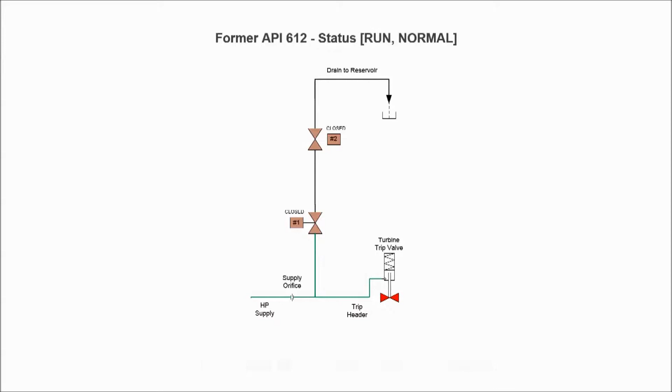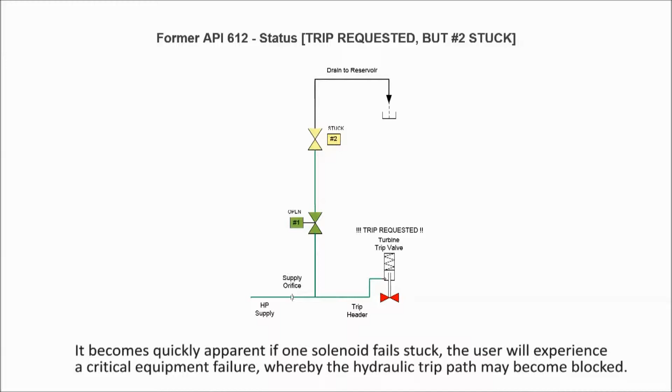In the past, API required 2 valves in series, as shown here. It becomes quickly apparent if one of the solenoid valves fails stuck, the user will experience a critical equipment failure, whereby the hydraulic trip path may become blocked. The updated API moves to a parallel configuration, shown here, allowing for improved safety, but leaving the user exposed to nuisance trips.

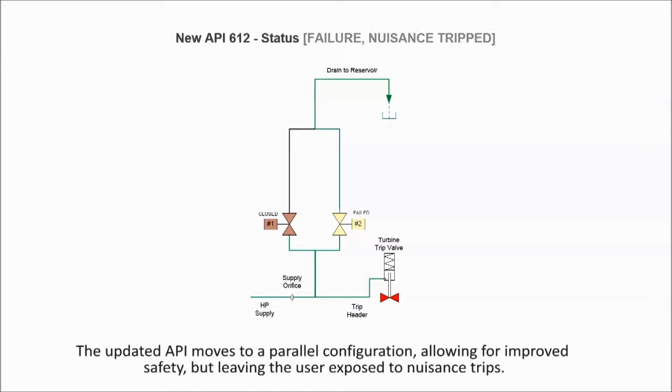Section 12 has added an enhancement to the reliability through a 2 out of 3 recommendation, or a 2 out of 2 taken twice as shown here, where no single failure can prevent the unit from tripping, and no single failure would cause a spurious trip. API has also recognized the high temperature applications that are common for trip mechanisms by updating the insulation class from F to H.

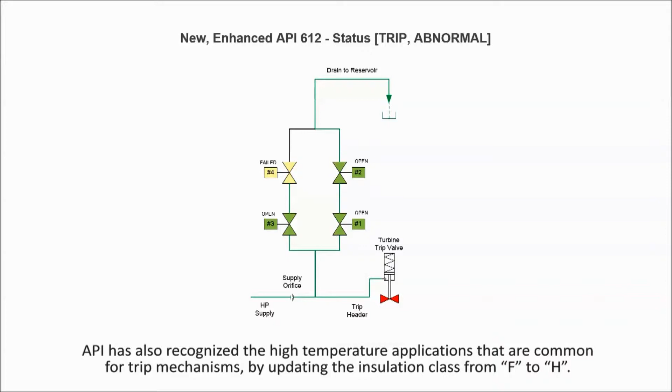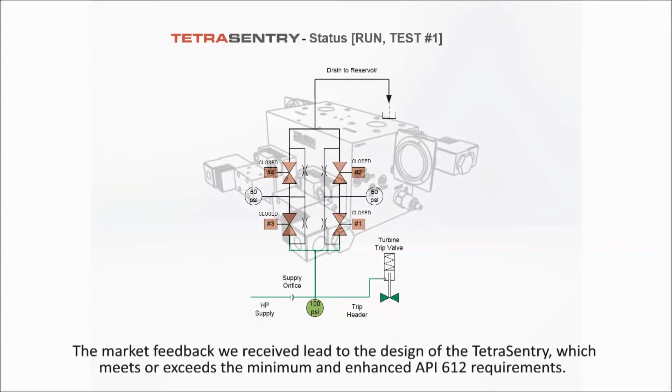We asked ourselves, if we were to design a fast, easy to maintain, and safe trip block, what would it look like? The market feedback we received led to the design of the TetraSentry, which meets or exceeds the minimum and enhanced API 612 requirements. With the use of 2 series sets of parallel solenoid valves, as shown here, there is redundancy in both the ability to trip when necessary and guarding against spurious trips, while allowing the user to run an extended period of time without needing to service the equipment.

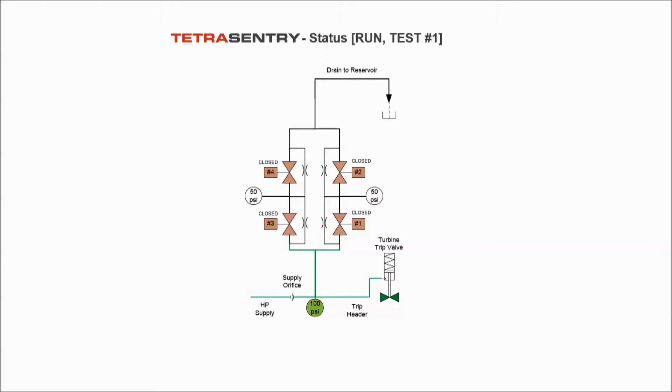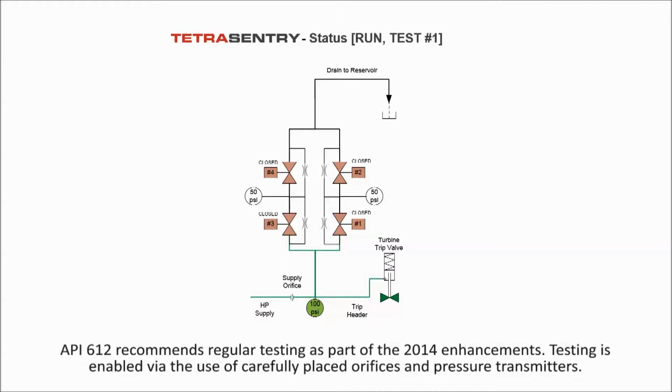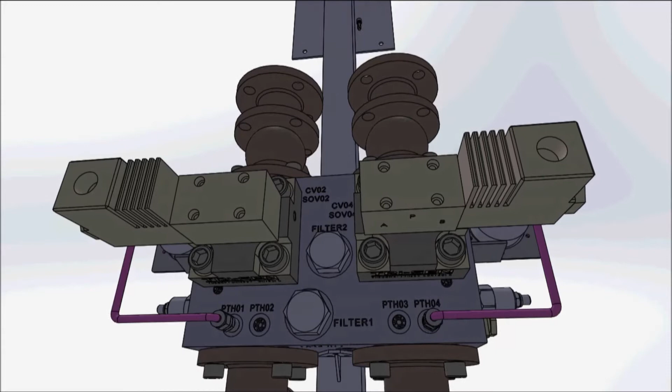API 612 recommends regular testing as part of the 2014 enhancements. Testing is enabled via the use of carefully placed orifices and pressure transmitters, as shown here. By de-energizing one solenoid at a time and monitoring the pressure, a predetermined threshold of acceptable response can be observed. This threshold can speak to the fitness of service for all critical equipment, including the status of filters, master solenoid valves, slave pilot sections, isolation valves, orifices, and other equipment.

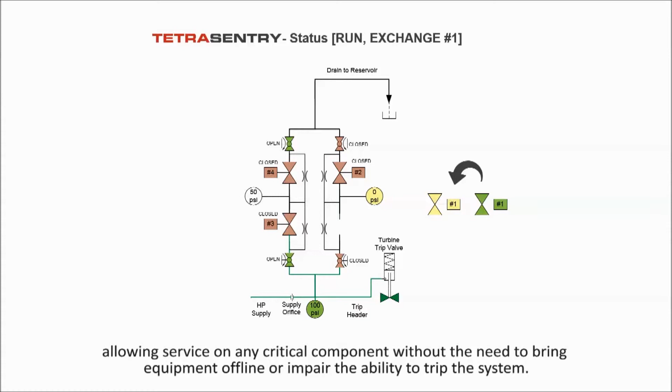Should a component be found deficient and require service, isolation ball valves can be provided on the drain and supply side, allowing service on any critical equipment without the need to bring the equipment offline or impair the ability of the system to trip. Conveniently placed and compact diagnostic transmitters are available to address the critical equipment recommendations in API.

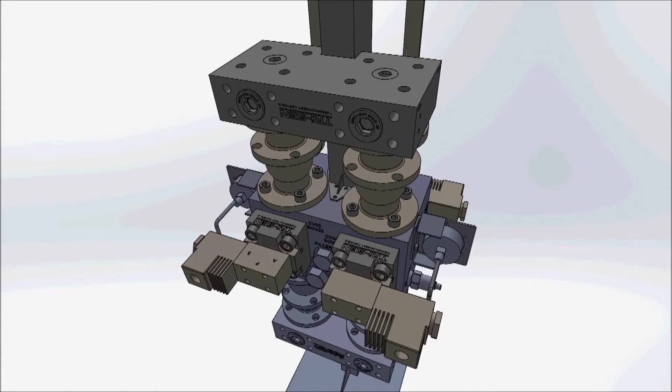A consolidation manifold is available to serve as a hydraulic marshalling point. Flexible hydraulic interfaces such as ASME B16.5, Code 61, or SAE O-ring boss interfaces are provided. This manifold also serves as a convenient place for the customer's trip header connection orifice.

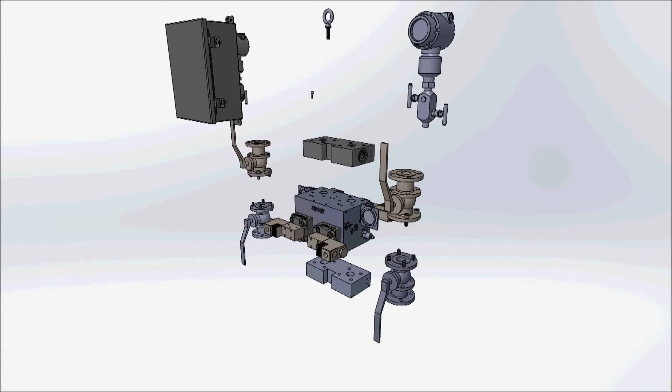This is an example of a fully configured Tetrasentry. The flexible design allows the isolation valves and other components such as pressure transmitters to be mounted remotely, making the Tetrasentry a very compact and flexible design. The core components are approximately the footprint of a small picnic basket.